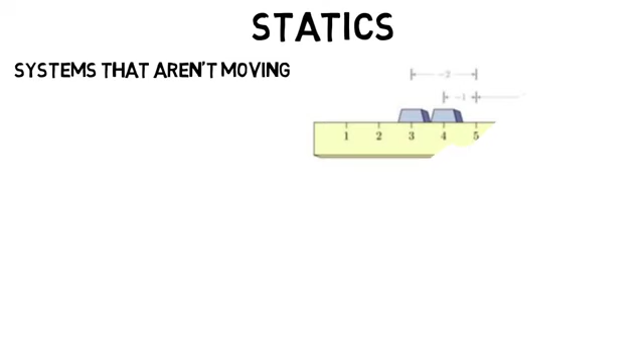Now this subfield is the most math intensive and has lots of physics. All civil engineers will take a class called statics, which is all about the forces and systems that are not moving. In basic physics, you may have done a statics problem, like where does this support have to be for the system to be totally balanced and therefore not moving. You summed all the forces which equaled 0 and all the torques which equaled 0. And that's the basics of statics.

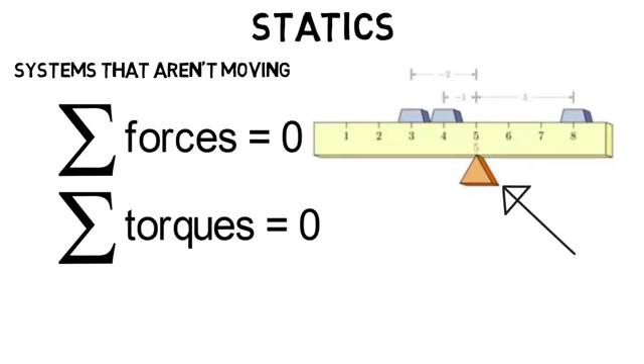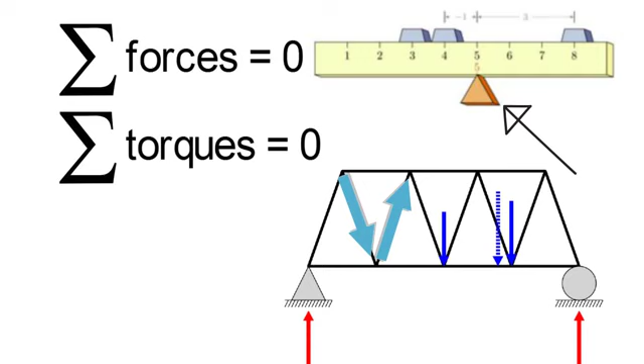So if you're looking at the forces within a bridge or truss, well, the same principles apply, but now there's just more to it. The weight is straight down as shown in blue, all the beams exert forces on one another, but the sum of them is equal to 0, and the torque sums to 0 as well because the bridge is not moving. And it's of course even more complicated than this, but if you enjoy that kind of basic physics you see above, then you'll likely enjoy the statics and physics you see in structural engineering.

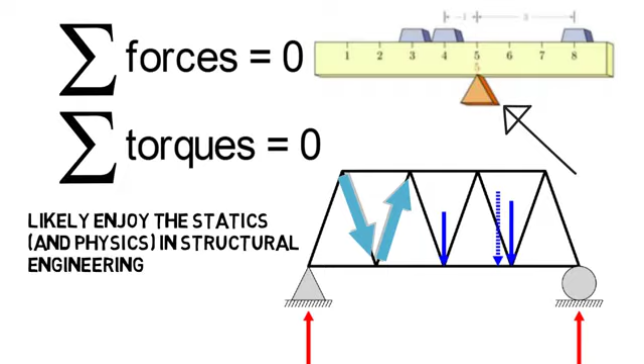So that's just a very simplified explanation, but now let's dive into some of the classes they would take. One class that would be important for structural students is a reinforced concrete class.

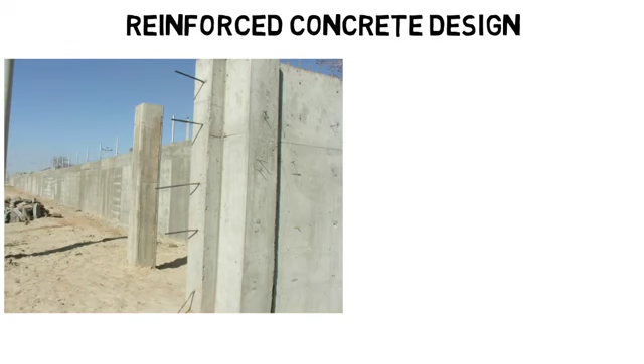In concrete structures, they reinforce it by putting steel beams in the concrete. We can't see those beams, but here, before construction is done, you can see them sticking out, or you can see a lot of them on these unfinished columns. So why do they do this? Why isn't concrete good enough?

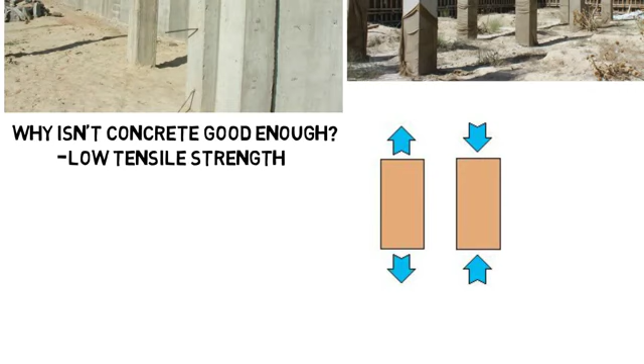Well, concrete alone, once hardened, has low tensile strength, as in it does not handle being pulled very well. However, it's okay with being compressed. But to counteract that low tensile strength, they add steel beams and pour wet concrete, which hardens around them, and then those steel beams have high tensile strength to counteract those types of forces on the structure.

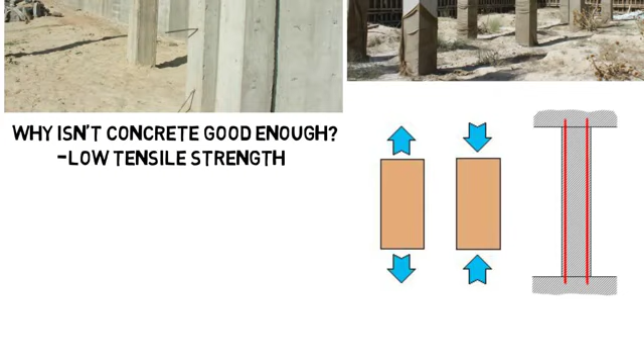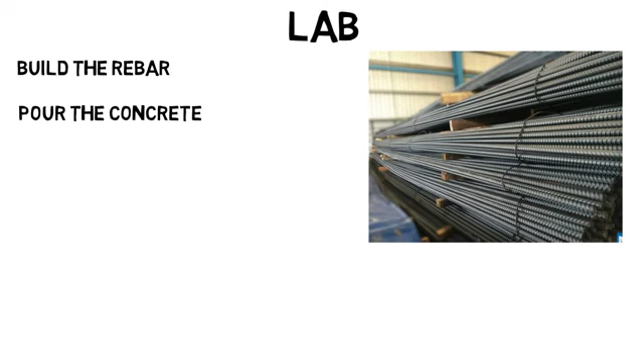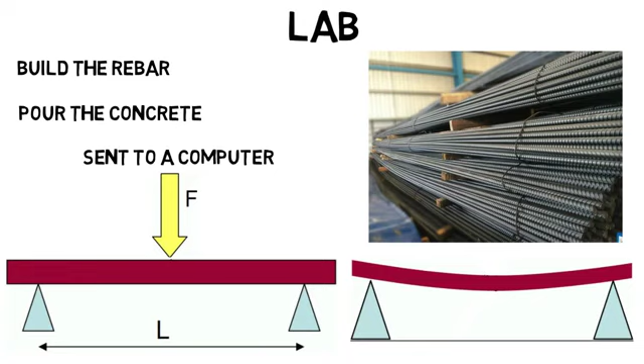So in a lab for this class, you might build the rebar, or the steel reinforcing rods, pour the wet concrete onto them, then once it dries, use a machine that holds the beam on both sides, then apply forces in the middle and keep increasing the force until the beam breaks or cracks and starts falling apart. That force being applied is sent to a computer that tells us the loading on the beam so we can collect the data and get the properties that we need.

You could take structural dynamics as an elective class. Dynamics is about moving systems, unlike statics. So this is one of the few classes where motion is included. So whether it's wind or an earthquake that shakes a building, you need to know how that motion will impact the structure itself and all the forces within it.

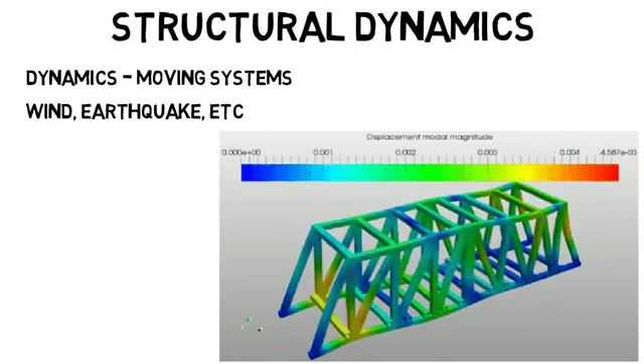I've shown this animation before, but mostly for mechanical engineers as it's a vibrating system that they could analyze, but civil engineers could get into this as well. They have to make sure their designs can stand up against any type of movement the structure may be subject to. You could take an elective class on seismic analysis, which is specifically about calculating the responses of a structure to an earthquake, or one on bridge engineering, which would be a class on highway bridges, materials used, distribution of loads, and how forces are spread throughout the structure, and so on.

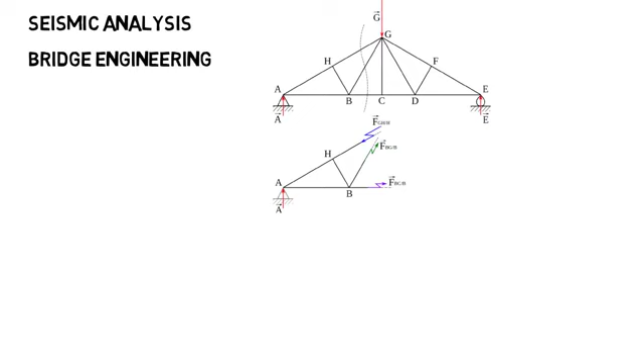Mechanics of materials, like how twisting and bending a beam or column causes it to become internally stressed. Timber structure design, which is about analyzing properties and forces within wooden structures, and much more.

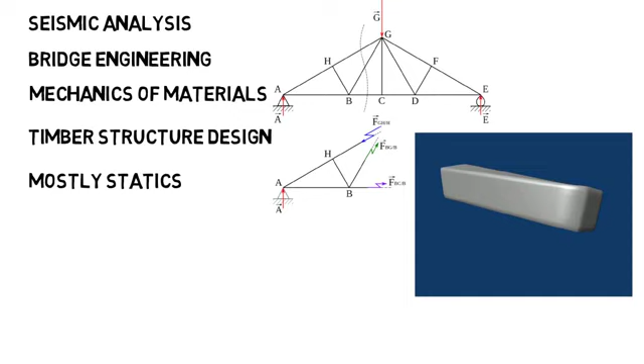You may still have to do hand calculations, but most of the rigorous analysis you learned in school will be left to the software.

Now let's move on to geotechnical engineering, and you'll already see how different these disciplines are. Geotechnical engineers are concerned with the behavior of earth materials like rock and soil, but the main focus is soil. This may seem odd, but you'll see how important this is. The structural engineer can do everything right to make sure the building will stand up, but if the geotechnical engineer messes up and you put a structure on soil that can't withstand it or is uneven, the building could fall, sink into the ground, or even lean to one side, probably the most famous being the Leaning Tower of Pisa, which was a result of soil issues.

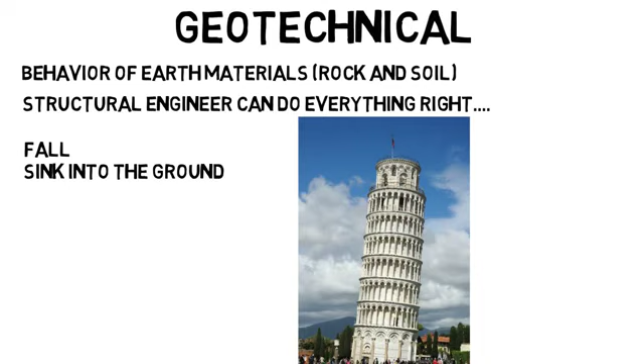Then they also have to consider the foundation of the structures being designed. Should they have a shallow foundation or a deep foundation? You may not realize it, but our houses and all the buildings you see have foundations that go underneath the earth to keep the structure as stable as possible by transferring the weight from the structure to the earth.

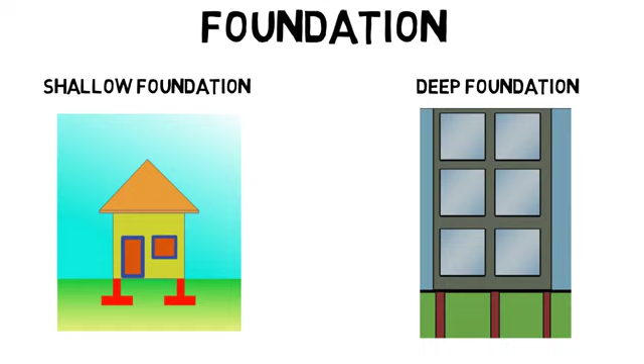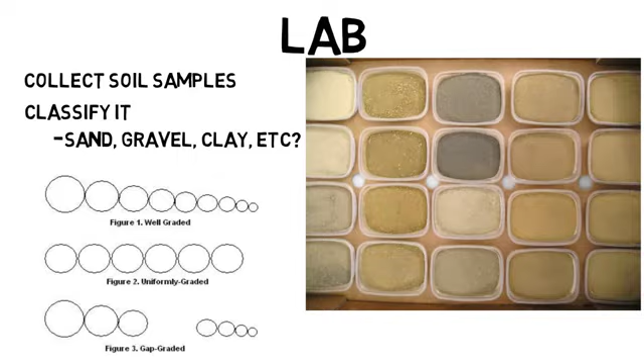But geotechnical engineers rely heavily on testing. So a lab you might see in college is to go out as a class and collect soil samples around your university and bring them to lab. You would have to classify it, like is it sand, gravel, clay, etc. There are many soil types, and you may have to look at the grain size or how it reacts to water. You determine its water content by analyzing the sample, which will be comprised of solid soil, water, and air of different masses and volumes.

But most importantly, you'll measure how the soil will react to mechanical loading or to different forces acting on it. So you might perform a triaxial test, for example. Too complicated to explain for this video, but essentially you put the soil in an enclosed area and apply a force or load to the top which pushes down on the soil. Then pressure sensors measure the pressure at different points to see how the soil is being affected.

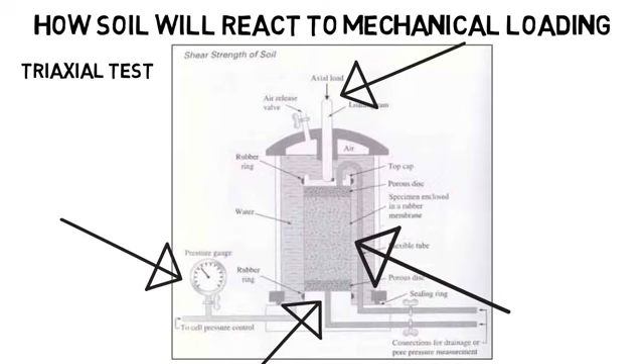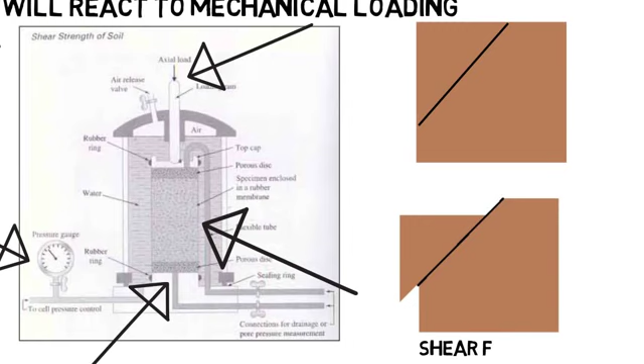If you imagine a square sample of soil and you add a force to the top, the soil can fail along some weak plane. Basically, the weight overpowers the friction holding the soil particles together, and the soil will start to slide, which is known as shear failure. Its ability to stand up to this is known as shear strength, which is one thing that the triaxial test on the left tests for.

This leads us to what a career in geotechnical engineering could be like. You might be the person who goes out to the field where a structure is going to be built and collects soil samples all around the area for testing. Or you could do testing at the field. One of the most used tests right now in this field is cone penetration testing, where a large truck goes out to the field with all this equipment on it, and a cone is pushed into the soil, and the pressure is monitored by a computer on the truck as it moves through the soil into the earth. Based on the pressure, you can analyze the soil mechanical properties.

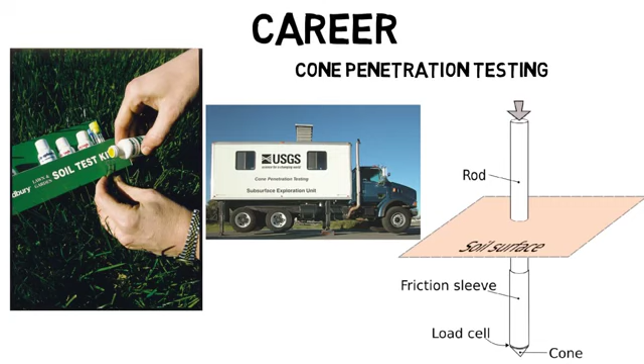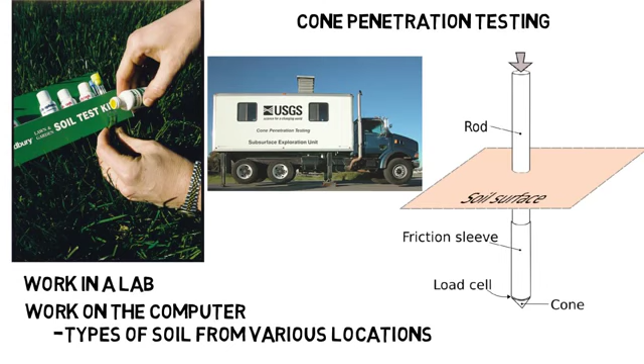Or maybe you could work in a lab where you would do testing on the soil after it's been collected, like I showed with the triaxial test. Or maybe you could work on the computer and input the different types of soil from the various locations at the site, so you can digitally lay out the area that the structure will rest on. So you could be in the field, in the lab, or on the computer.

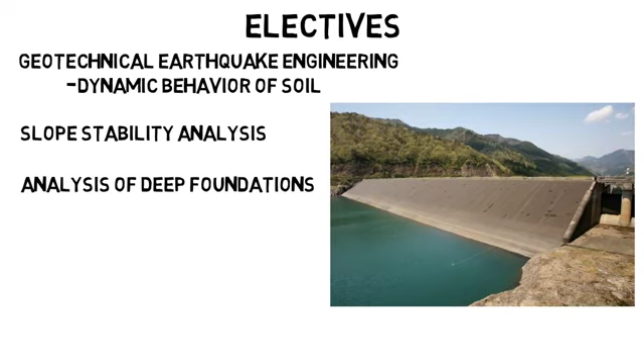Your elective classes could include geotechnical earthquake engineering, which would be like learning the dynamic behavior of soil as opposed to the structure itself. Then slope stability analysis and how to safely design structures on slopes. An example would be an embankment dam. Analysis of deep foundations, where the structure goes deep into the earth for a stronger support, like for skyscrapers. And of course, there are many more classes.

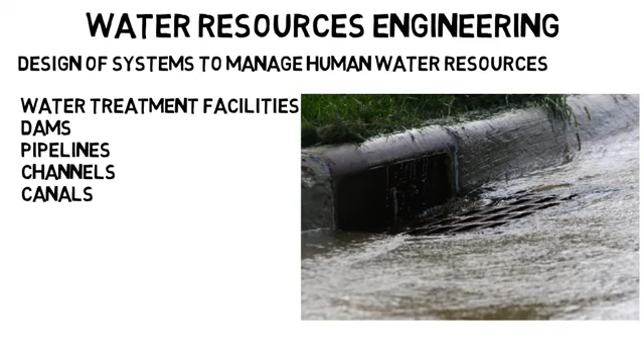Now let's move on to water resources engineering. This is about the design of systems to manage human water resources. They can work on a water treatment facility, designing dams, pipelines, channels, canals, and so on. Maybe you have to design a storm drain system in the event of a large storm. Where is all the water going to go, and how will you get it to the ocean efficiently? Or you could design a canal, which is an artificial waterway to transport water for irrigation, or can be used for ships and boats. Or you could design a culvert that will allow water to flow under a road or trail or some other obstruction.

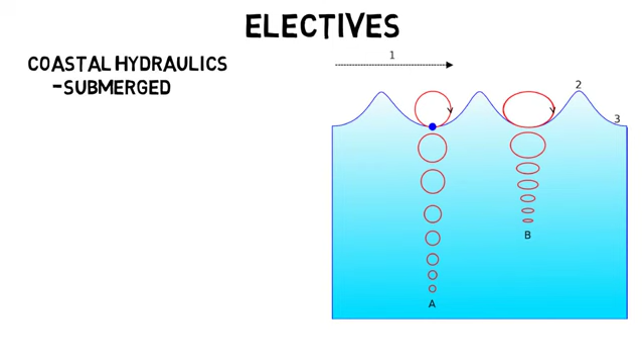Elective classes you could take include coastal hydraulics, where you learn about ocean wave propagation, submerged pipelines, seawalls to protect human habitation, and so on. Or open channel hydraulics, which is about fluid flow in an open channel as opposed to a closed channel or pipeline.

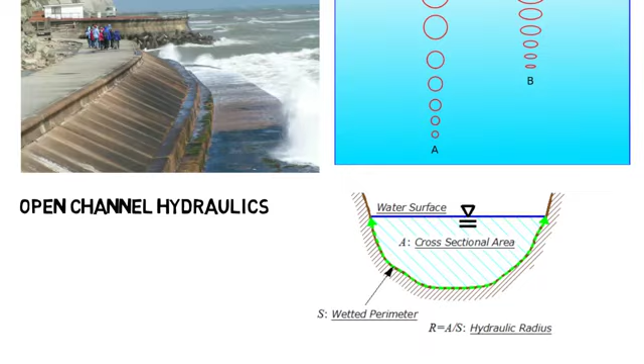And last is transportation engineering. This is about safe and efficient movement of goods and people. These are the engineers who design streets, roads, highways, railroads, public transportation systems, and even airports.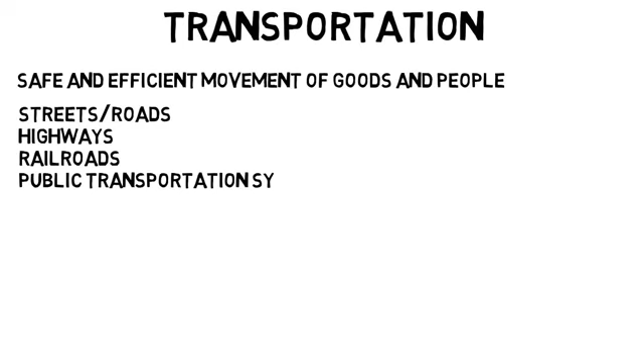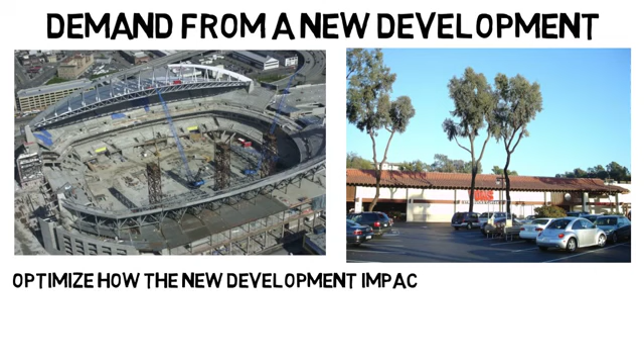An engineer might look at the demand from a new development, whether it's a new stadium or a new grocery store in a new location. This causes new types of traffic throughout the area, so engineers try to optimize how the new development impacts existing traffic. They look at data from similar places to see what kind of traffic they get, then try to make improvements where possible.

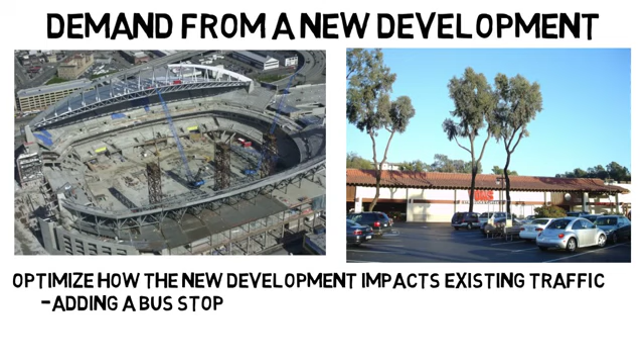It could be simple, like adding a bus stop in the nearby area, all the way to expanding the roadway to allow for more traffic.

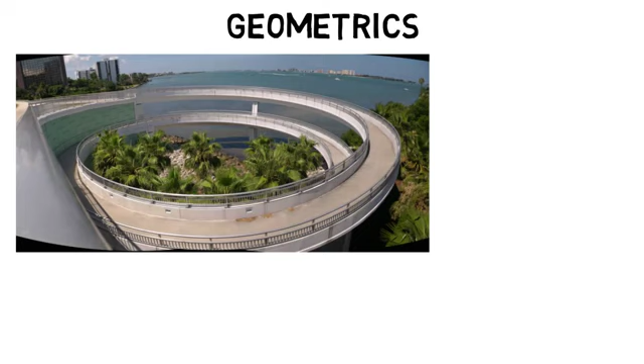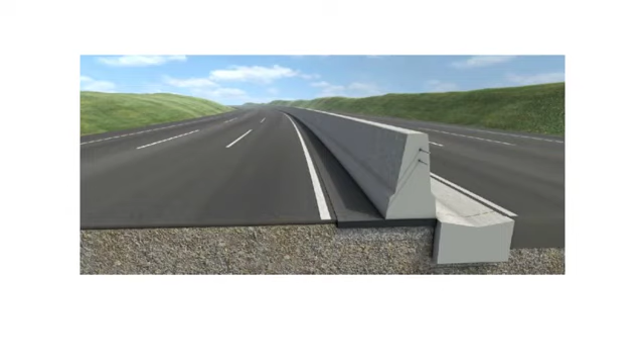They could work on the geometrics of the roadway, such as what radius of curvature an off-ramp needs for a car going 55 miles per hour so the tires won't slip. Or if going up an incline, the driver needs to see far enough ahead to stop for a sudden obstacle. Or what the cross sections of a freeway need to be for the lanes and shoulders to accommodate expected traffic.

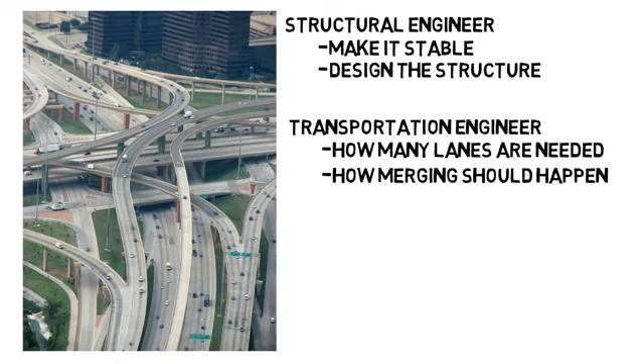Let's say a highway interchange is being designed. A structural engineer would make it stable and design the structure itself, but the transportation engineer would determine how many lanes are needed based on traffic, or how the merging should happen to maximize safety. They make sure the layout maximizes traffic flow and safety, rather than focusing on the physics of the structure itself.

Often these engineers evaluate potential improvements to cities rather than create a totally new design. You probably haven't had many new highways put into your city recently, but there's probably been construction adding an express lane or bike lane, etc. So they might not create a new bus system, but they may optimize the existing one—taking data on how many people get on the bus, how long the route takes, how long people wait, and so on, to optimize the route, the number of stops, and more.

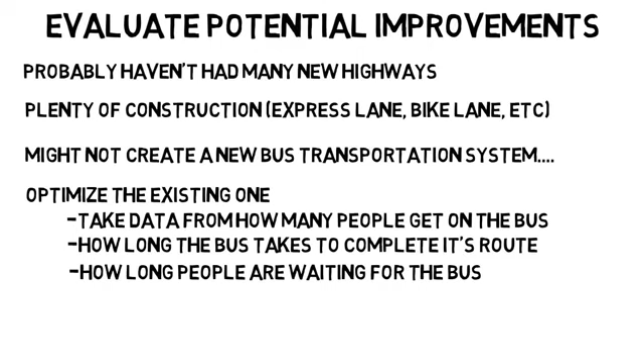Your career will also likely involve a good amount of computer work. You might have to create a layout of a new lane, off-ramp, bridge, or whatever you're designing using AutoCAD, which is a very important software for civil engineers.

Or you could use software to analyze and simulate traffic. You could lay out the roadway of a city and use collected data of traffic during different times of day to simulate new additions, like adding a stoplight somewhere and seeing what the new traffic would be like. Or make a minor change, like making a stoplight stay green a few seconds longer, and see how it affects traffic on those streets.

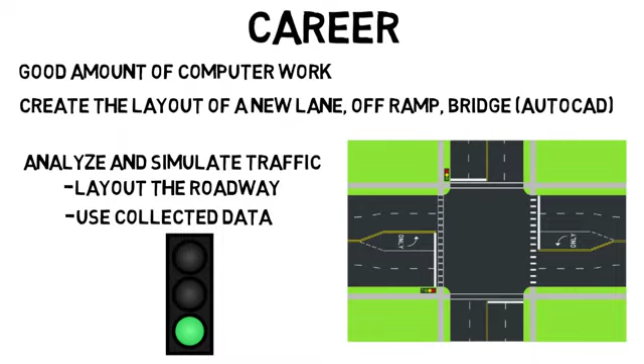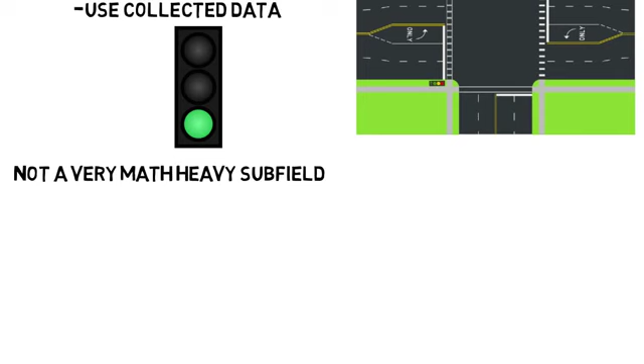Just a note, this is not a very math-heavy field. In fact, it's probably the least math-intensive of the four subdisciplines I've talked about. It's more about taking data and analyzing it. Even with the radius of curvature example, you won't use the coefficient of friction and do circular motion physics or anything like that—you use even simpler equations to get what you need.

Now that's all the main subdisciplines of this major, but there are some final thoughts I want to include.

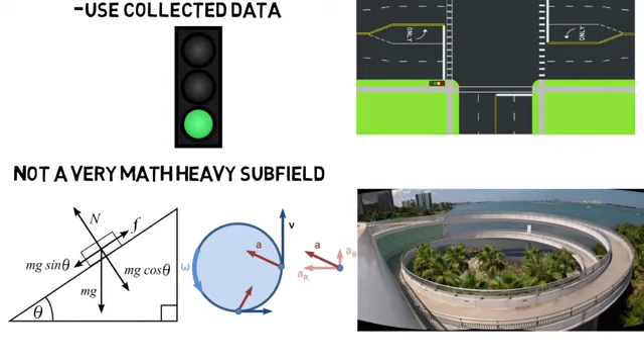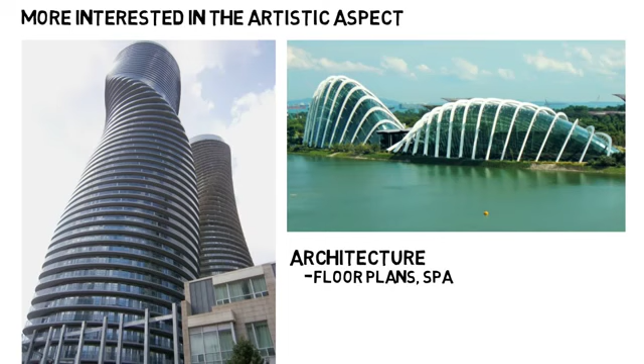If you're more interested in the artistic aspect of building and structure designs, then architecture will be better for you. Architects deal more with floor plans, spatial concerns, and the shape and design of buildings. They have to understand structures and physics, but not quite as much as a structural engineer. They hand off their design to the structural engineer, who makes sure the entire structure can support itself and deals with more technical work.

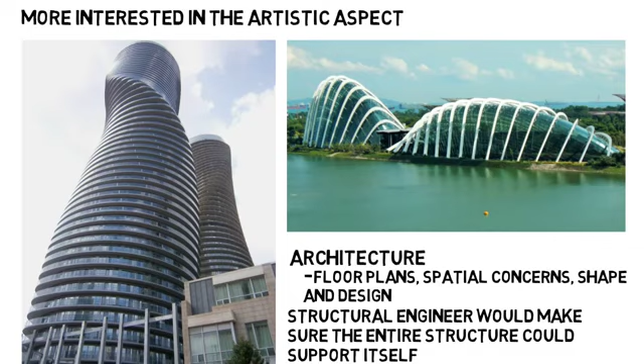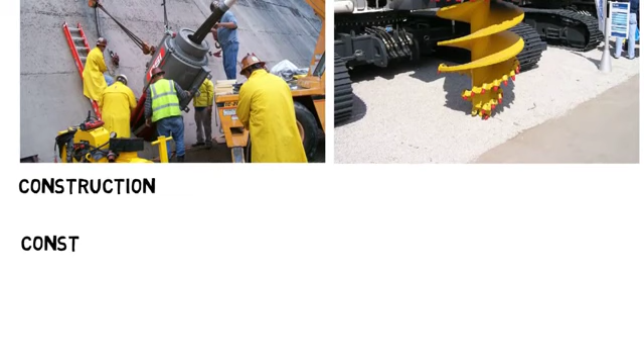If you want to be the one who puts on the hard hat and does hands-on work with machines, physically building structures, then construction will be better for you. But there's also construction management, which you can get into as a civil engineer—construction companies hire civil engineers for their technical background. Construction is the hands-on part, but construction management is more about guiding the construction, putting together schedules, budgeting, and figuring out how all the pieces come together.